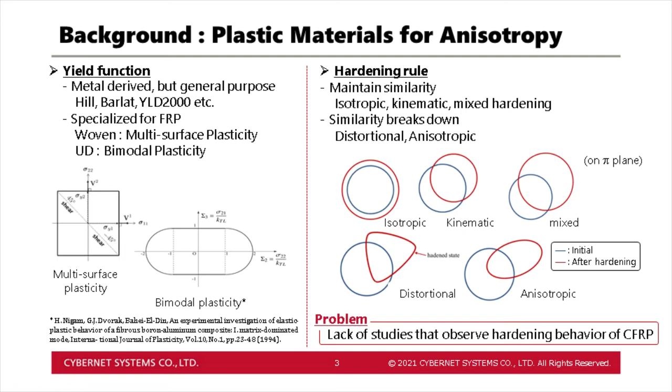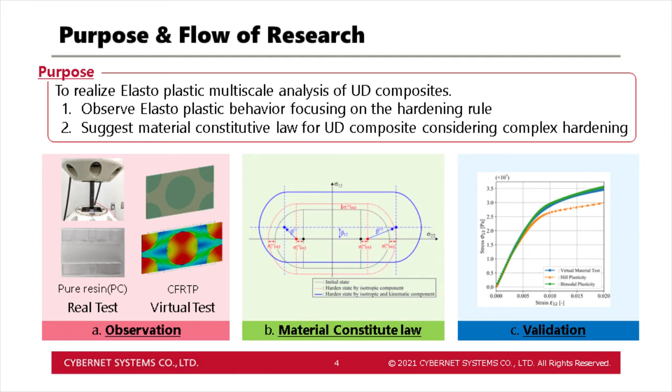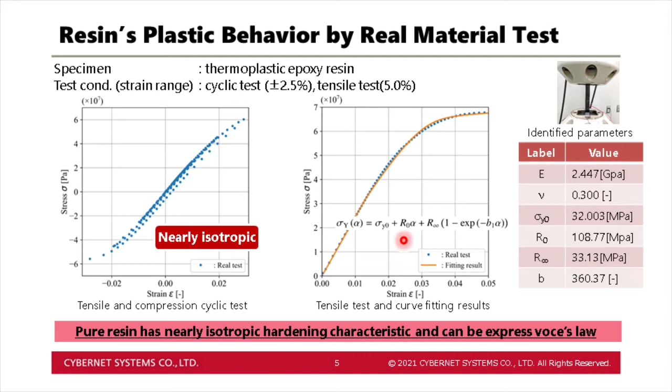The result is shown in the graph on the right. In the cyclic test, we were not able to test to the large strain range due to buckling on the compression side. Therefore, a separate tensile-only test was conducted exclusively for the identification of the material constants. For the isotropic elastoplastic material model, we used the Voce's law as shown here. It was confirmed that it can be fitted very well.

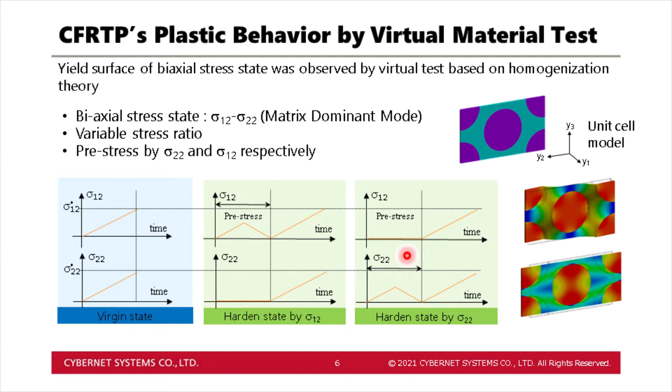A conceptual diagram of this stress state is shown in the blue hashed area. In order to draw the yield surface, analysis was performed by varying the stress ratio of these two components. In order to observe the yield surface after hardening, the same tests were conducted for the pre-stressed condition. The pre-stress was tested for two cases, one with pure shearing and the other with uniaxial stress as shown in the green hashed area. This is the actual shape of the observed yield surface.

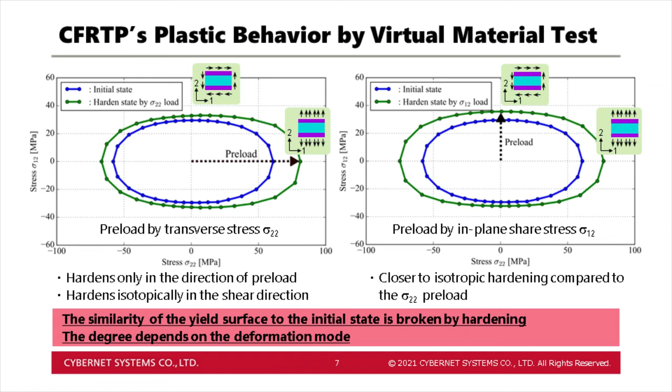From the above, it was confirmed that even if the resin has isotropic hardening behavior, the UD composite has anisotropic hardening. Moreover, this behavior is dependent on the stress state. In the next slide, I will introduce the overview of the material model proposed by our study. This slide shows the yield function, hardening law, and flow rule respectively.

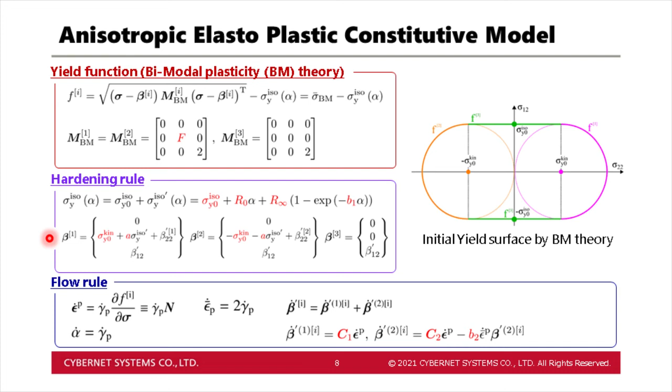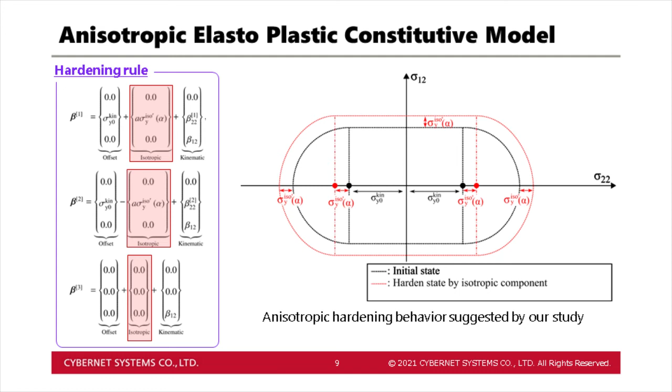Let's first look at the isotropic component. In isotropic hardening, the yield surface maintains a similar relationship to the initial state, so it changes as shown in the red line of this figure. The important thing here is that in order to maintain the similarity relation, the center position of the arc must have moved. This is the second term of the development rule.

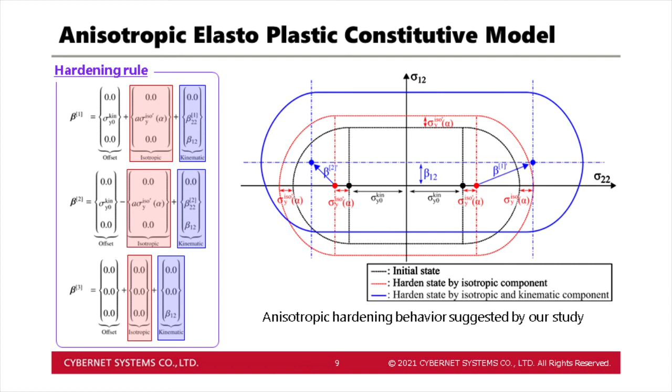Finally, there is a back stress that develops in conjunction with plastic strain. I will not explain in detail due to time, but our model can express the distortion by developing back stress for the tensile and compressive sides independently.

Now, I will show the results of curve fitting the virtual test results using this material model. First, I show the case where shear pre-stress is applied. The left side shows the yield surface. In addition to the results of the virtual test and response of the proposed model, the results of the classical Hill's model are also given for reference.

The blue, orange, and green lines represent the results of the virtual test, Hill's model, and our proposed model respectively. The circular plot shows the initial state, and the square plot shows the post-yield state. Obviously, the fitting accuracy of Hill's model is poor.

On the other hand, our proposed model shows better fitting results than Hill's model, both in the initial and after-hardening state. The right graph shows the stress-strain curve and the load history of load step 3 shown in the left figure, where Hill's model clearly shows excessively high yield stress.

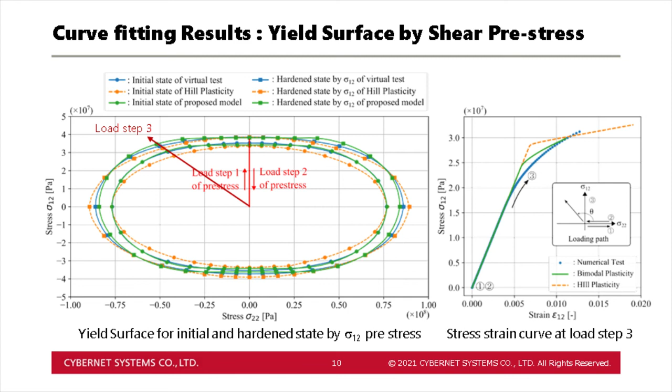The hardening behavior under transverse pre-stress was also verified in the same way. In this case, the yield surface is distorted more than the hardening due to shear pre-stress. Therefore, Hill's model clearly fails to capture the characteristics of material behavior observed by the virtual test. Whereas, the proposed model successfully expressed the feature of large overhang in the pre-stress direction. Not only that, the yield behavior on the compression side is also accurately fitted.

The stress-strain curve for the typical stress history is shown on the right. Our proposed model captures the yield point of the virtual test well, and we can also confirm the fitting accuracy of the stress-strain curve in the re-yield region.

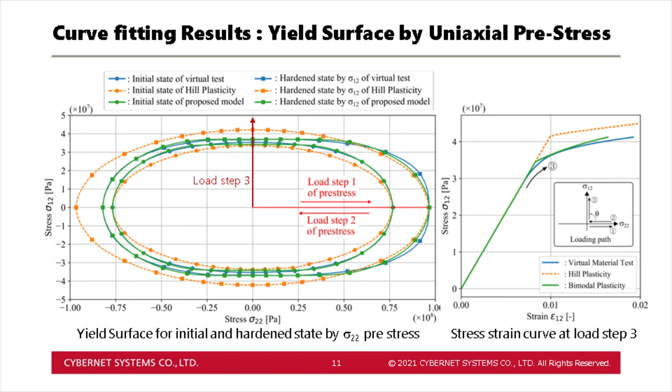I would like to summarize the main findings of this study and talk about a future plan. We investigated the elastoplastic material behavior of UD composite. The material behavior of the resin was observed by real testing. Then, the material behavior of UD was observed by virtual material testing. As a result, it was confirmed that although the resin has isotropic hardening character, the yield surface of the UD composite tends to be distorted by hardening, depending on the stress state.

In order to represent this material behavior, we proposed a new material model that combines the bimodal plasticity theory and the original hardening rule. The validity of this constitutive law is confirmed by the fact that it can accurately fit the response of the virtual test.

Our plan for the future is to implement a more robust verification process. Specifically, we will perform realistic cyclic tests of UD composite, where a biaxial stress state can be created by changing the orientation of the fibers. By comparing the experimental results with the analysis results, we hope to be able to confirm the validity of our model in more detail.